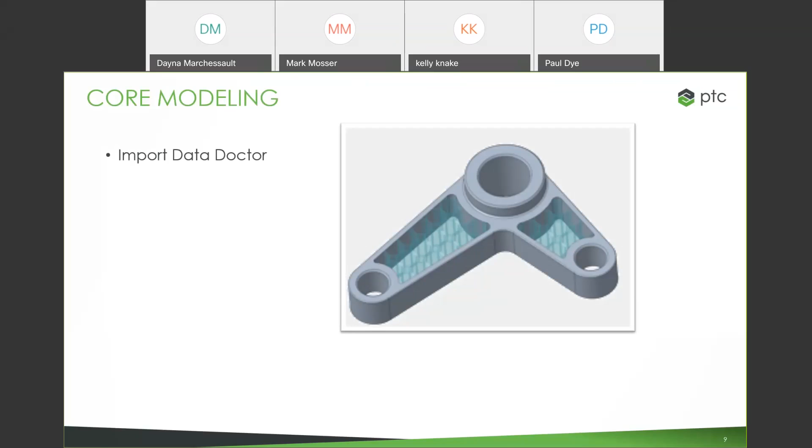We also have new display filters for geometries or representations. Whenever you're showing off different representations, we've improved your ability to show off different features. For example, if we wanted to share this design but highlight a couple different features, you could turn everything in the main body transparent, highlight, and change the appearance of these different latticing features. Definitely a lot of different uses there.

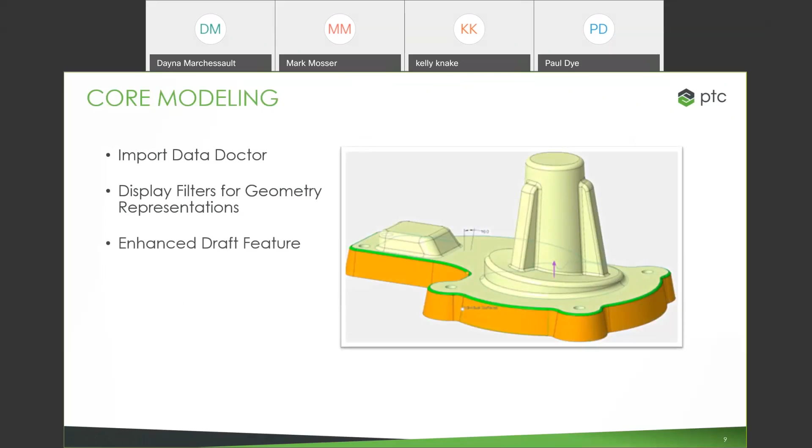We had enhancements around the draft feature as well, things like drafting already drafted features, and the ability to detect existing draft angles right in the model. It makes it a lot easier to work with and modify later on as we keep building on top of that.

Also improvements to the performance of snapping to model geometry or to a grid. This is another way to work, if you want to quickly move about and sketch onto points, edges, or different parts of the model geometry, you can turn on snapping to a grid for a lot of different uses. Whenever you don't need that, you can very quickly snap it off. Just another option in our quick menu settings.

We made enhancements to the mirror tool in the sketcher. It makes it very easy to grab things and mirror about - essentially you can mirror about anything now. Just grab a straight sketch you have and mirror about it. Even as you make changes, if you change the dimensions, your mirror feature is going to update right along with those.

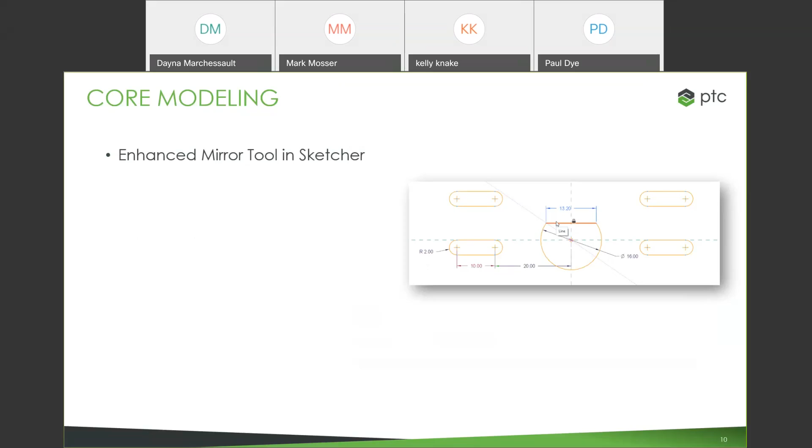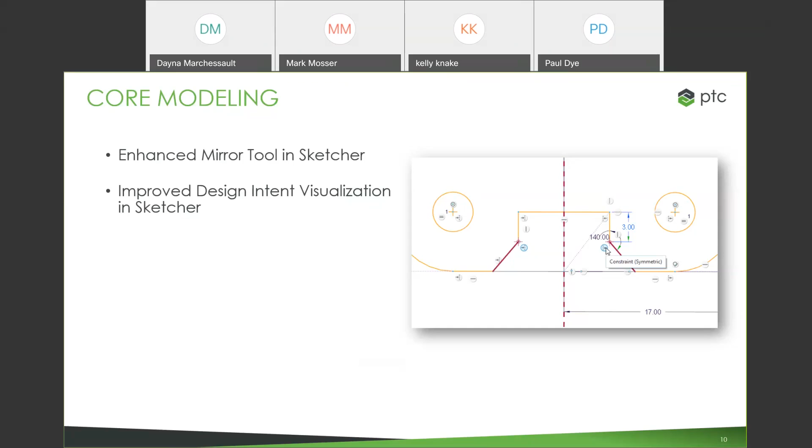We made improvements to the visualization of design intent in the sketcher. We've improved the look of the relation icons, able to highlight references and change colors. That's something you'll probably notice over the past couple releases of Creo - we've really made strides in modernizing the look and feel for working not only in Creo in general, but here in the Sketcher as well, building out your ability to display that type of design intent throughout creating sketches.

Finally, here in the edit dimension selection, you're able to set the appearance of your Sketcher constraints. That means whenever you click to edit any of those dimensions, it will also show the constraints. So that's another config option we have that we can edit there.

So that's pretty much it for going over just a couple of different core modeling capabilities. But what I want to move into now is more into some of the applications that we work with.

Starting here first with Creo Simulation Live, aka CSL. If this is something you haven't worked with before or even seen in the past, essentially it's a tool we've developed as part of our partnership with ANSYS. This is putting real-time simulation right in the modeling environment.

Normally it's another software you have to jump over into, build out a mesh and run through this whole simulation, whereas with Creo Simulation Live, it's really just right in the same parametric modeling environment that you're used to. It cuts out a lot of the process and the real headache that goes into getting the benefits you get from running analysis, right in the context of where you do design.

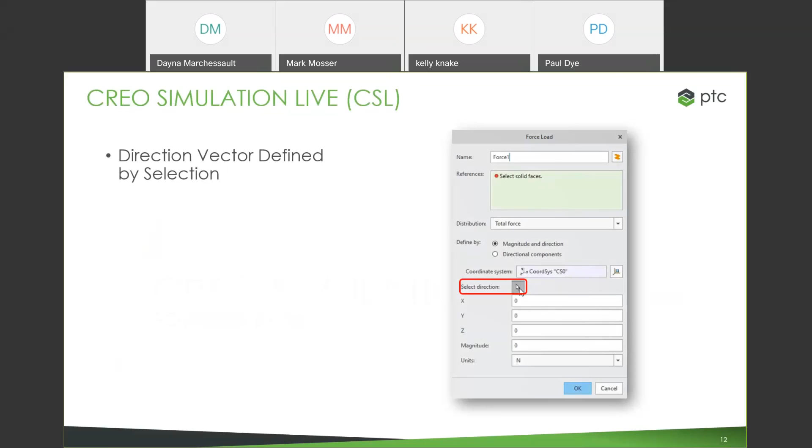It's real time. So quickly first, we're going to go over some of the improvements we made in this area. First is the ability to control the direction vector from a selection, so it doesn't have to be a default, and you don't have to go through and define all the XYZ components. You can simply select the direction, pick on any of the faces or wherever you want to use to define that, and it's going to build out those directions for you.

Building off of that, you're now not locked to working with the global coordinate system. You can now select any coordinate system that you have defined to go through and work with those load cases. So it's just improving the general ability to define those loads at the start of whatever study you want to do.

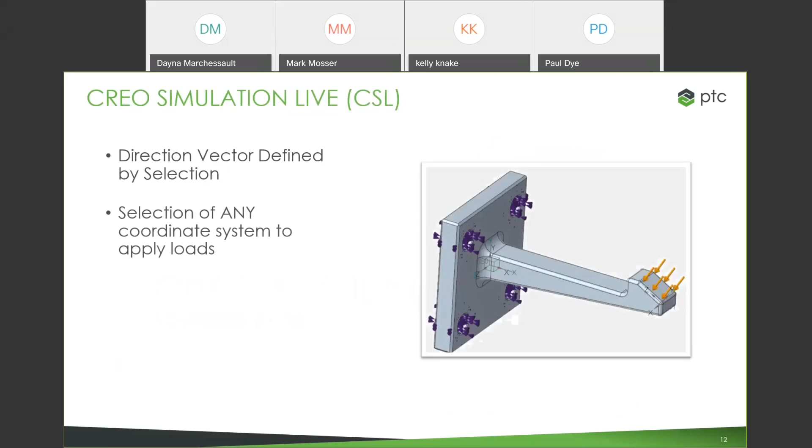We can also use values that we get from our simulation probes in Creo Simulation Live and utilize them in our behavioral modeling studies. Behavioral modeling allows us to take values, like your maximum von Mises stress or the displacement in a certain area, and actually optimize around it. We can tell the system certain dimensions it can change and different variables it can use, and the system goes through and automatically optimizes the model for us based on what we allowed it to change. It's a very useful way of using some of those analysis results we get back from CSL.

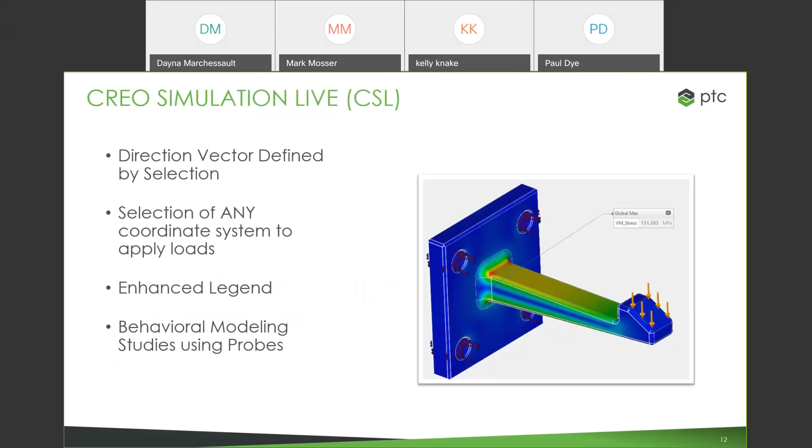Next, we've added more real-world constraint types, things like ball, pin, and planar constraints—things that exist elsewhere in Creo, but now we're able to use them in the context of CSL as well. It's just helping us make each of these cases more realistic to the problem or situation you're really trying to design around.

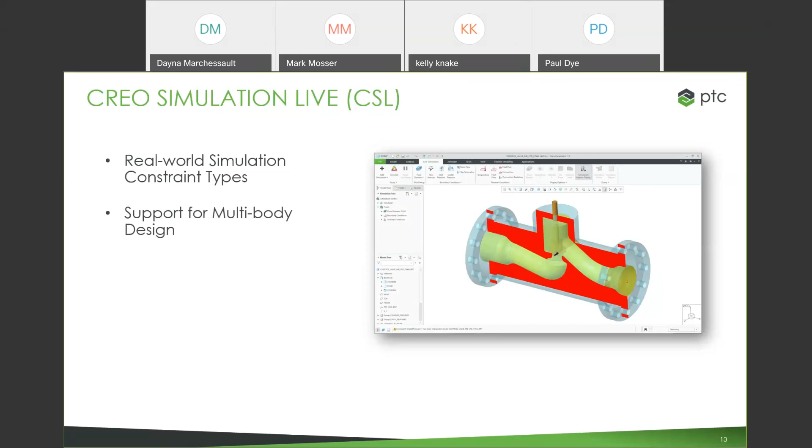CSL now has support for multi-body design, which I'm going to talk a little bit more in depth about, just multi-body in general. But obviously there's a lot of different applications of that—things like cavities, creating internal or external volumes, domains, and a lot more around those. Specifically for thermal studies, we can now do transient thermal studies, aka time-dependent analysis, which allows you to see how your results are changing over the course of time. So now in the context of that thermal study, you can do either steady state or time-dependent analysis.

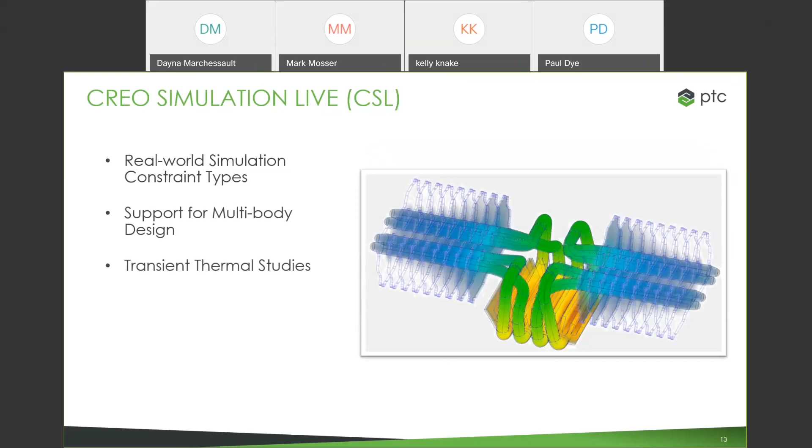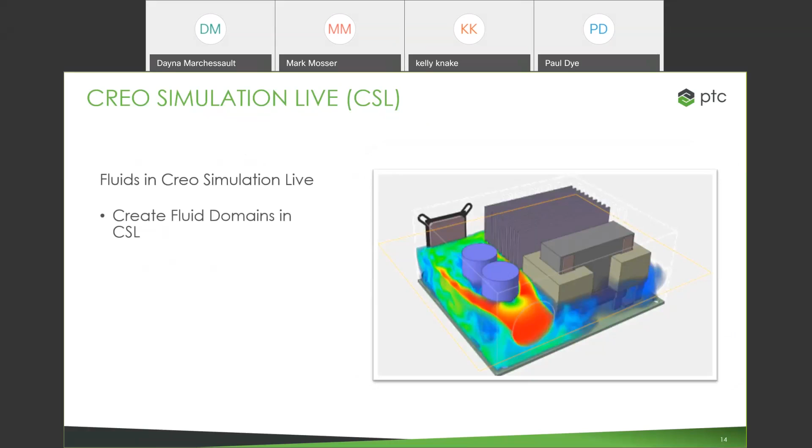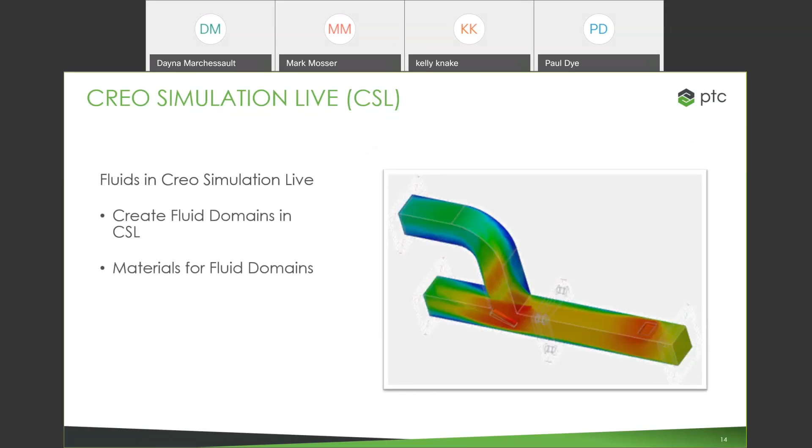The biggest change to CSL with the release of Creo 7 is now the option to do flow analysis. In the same way we do for structural, thermal, and modal, we start by creating a fluid domain, specifying which areas to include in the study, whether it's an internal or external flow, defining the inlets and outlets, and then specifying the materials you want to use. From there, you visualize it right on top of the model you're working with, regardless of if it's an internal or external case.

Around that, there are a lot of different options for the results you're getting. You can visualize streamlines, particles, take section views, direction fields, and set probes. It's a really powerful, but at the same time really easy to use tool for doing that type of flow analysis.

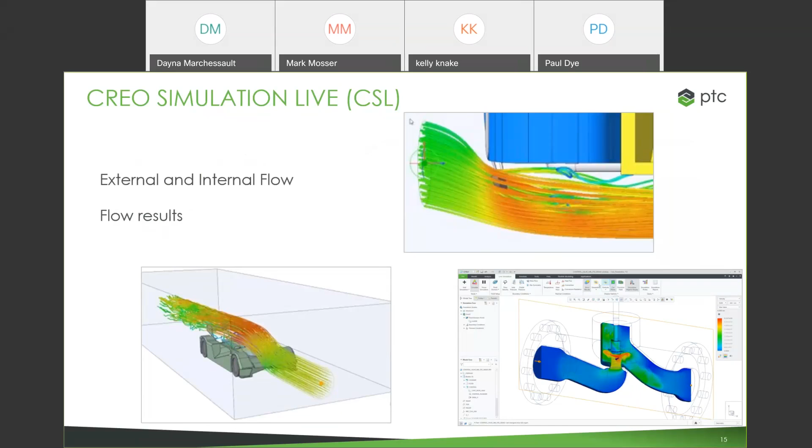Normally, if you wanted to work with things like this, you would have to get an expensive tool and have that expert knowledge to get real, actual useful results out of it. But this is something we don't have to send off to an expert analyst. As the designer, we can work with it right in the design environment and get those results back right as we're making changes.

Now I'd like to go through and show a little bit about what that looks like and how we work with this tool.

So let's switch over to our model here. For our demonstration of going through flow analysis, we're going to be working with a model for a muffler off of a motorcycle assembly. This is the part that actually came off of one of our customers, Royal Enfield, so this is the muffler off of one of their data sets.

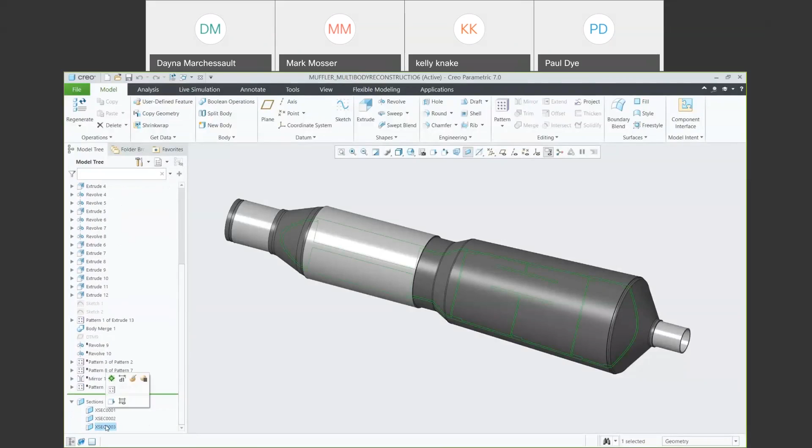What we want to do is simulate some of the flow that's happening with the system. Let's take a section view to see what we're working with here to start. There's definitely a lot of good geometry in here - a couple baffles, walls, and channels that we'll be able to change as we go further into this.

If we want to start into the study, we simply go right up to the top, click live simulation, and then start into the type of study we want to run. In CSL, you have different options - you can go into structural studies, thermal, modal. In this case, we want to do a fluid simulation.

The general path you lay out whenever you go into a flow analysis is first you lay out the fluid domain you want to work within. This could either be an internal case, an external case, or you could just have a fluid domain already defined and select that. In this case, we're going to do an internal flow through this muffler.

To do that, we'll simply define the inlet where we have the flow beginning, switch around to the back here, and define the outlet. The system automatically builds out the internal volume for that model. Once we select OK, that now appears down in the model tree, something I can go back to and make whatever changes I want later on.

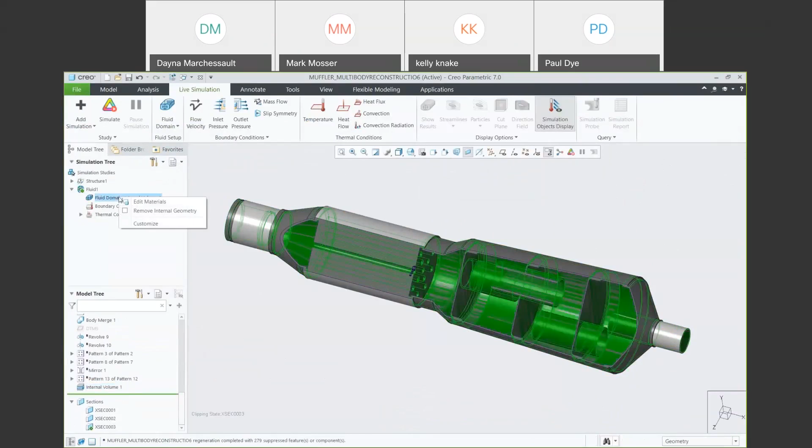From there, what I can do is define the materials for the study. We have a few base options laid out here that we could select from. In my case, carbon dioxide is going to be a really close approximation for what's coming out of my motorcycle, so I'll go ahead and select that.

Once we have that selected, we'll then go into defining the fluid flow velocity for my muffler - essentially, how fast is this going to be coming in from my motor. Specify the surface I want to work with, set the direction, set any of the magnitudes, even from a selection, and simply go ahead and do it like that.

So now I have that flow velocity set up. I can also set up some thermal conditions, maybe if I have a prescribed temperature at that inlet, and set the value, set the units - really whatever regular operating temperatures might be from that motorcycle exhaust. With that, I'm pretty much happy with a lot of the initial conditions around that inlet.

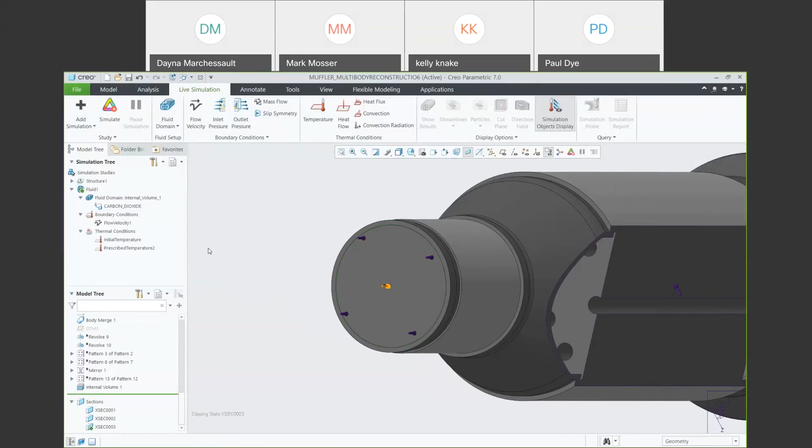So let's go ahead and move around to the back end here and define an outlet pressure. In this case, I'm just going to simply set it to 0, essentially just outside air. And with that, that's all we need to do.

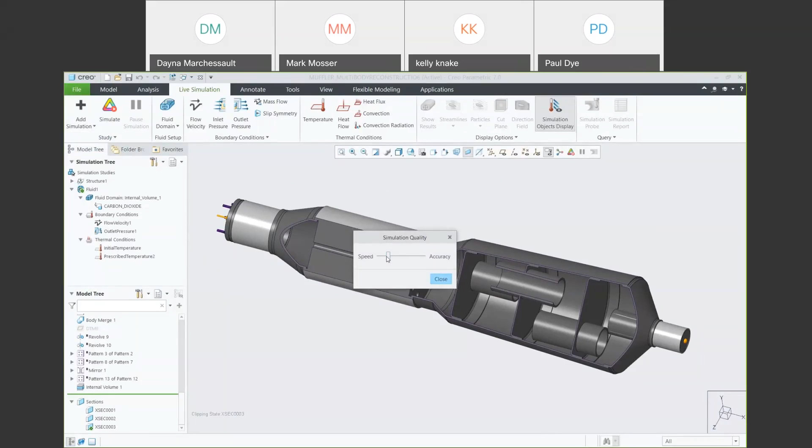We have some quick options we could go through here. We could change the simulation quality if we'd like, so we could slide it all the way over to the left if we'd like to focus on speed and optimize around that. We could keep it all the way to the right for the highest accuracy, or somewhere in between. In this case, let's leave it on highest accuracy, and we can simply go in and simulate.

As soon as I click to run the simulation, we're getting results back. It really is that fast.

I have a lot of abilities to change what I'm seeing here over my legend, if I only wanted to see the velocity within that particular range. I also have different display options I can choose from, maybe to visualize the flow of individual particles here, with even more options for that particle to change the size, change the transparency, really getting everything looking the way I want. This helps me understand exactly how this flow is working depending on how I set my model up.

Those particles are one really good way to analyze the flow. We could look at some other options here as well, like the direction field, which acts as a cut plane that I can use to see the direction everything's going. I can move that cut plane around to different parts of the model. Here I'll pull up my dragger tool and change that around to see the direction my fluid's moving based on however I defined it.

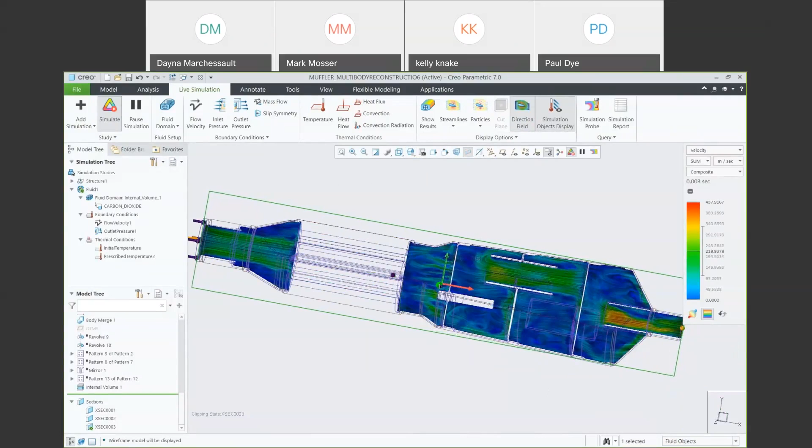This helps me really interrogate certain areas in the model. You can go through and type in specific values for that section view. As we can see, there's a lot of different ways to visualize the results, but on top of that, we can also analyze and begin to build off of those.

Starting here first, we're going to use a simulation live probe. This allows me to see the different values in the model. If we want to see our max velocity down by our outlet, you can see how that changes over the course of the flow. We can also see a graph of those values if we'd like, seeing them change, but also seeing how those are changing over time.

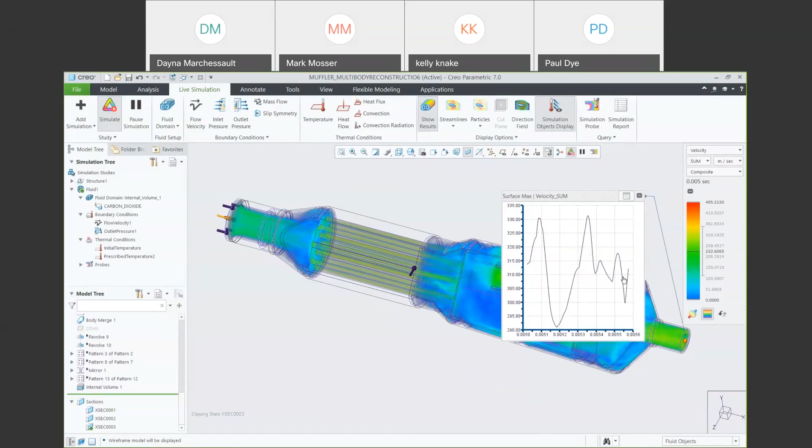We have other options as well to view things like pressure, temperature, vortices. Now these are all things that we can actually begin to design around. One of the best ways we have for doing that in the context of Creo is with the design exploration extension.

This is our tool within Creo for trying out new designs, iterations, branching off of existing designs. Instead of how you'd normally do it by doing save-as all the time, making copies, we simply just start into this with a pre-modified version of the model and keep it all right within this one session.

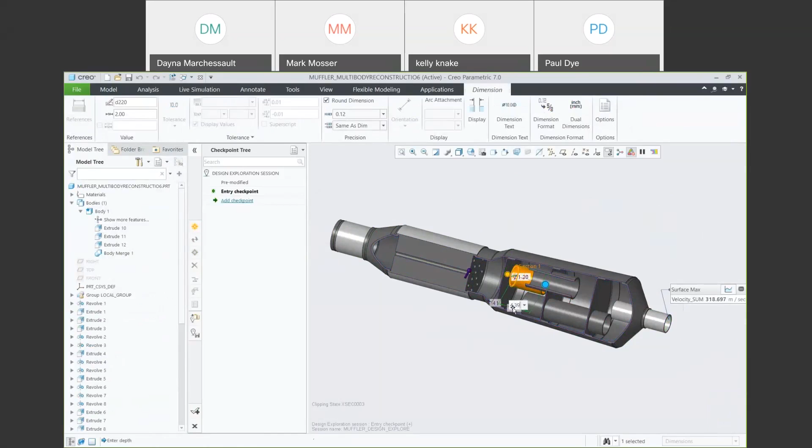As we go through and make changes, instead of saving off different copies, we're going to make checkpoints along the way. What I'll do here is for these internal baffles, see what happens if they were a couple inches longer. So we can go through and make any of these changes we want to. Even though we're running in this design exploration session with the flow analysis running, we're still able to do this standard sort of CAD Creo work that we're used to.

The difference now is as soon as I go through and make any of those changes, we're actually getting insight into what that does to our analysis. We check the particle flow, see where the velocity is increasing or decreasing, especially important down at my end velocity by that outlet.

You check that probe, see the graph, and that isn't something I send off to hopefully get results back by the end of the week. We go through, make the change, and see the result. And if I'm happy with the change I made, I'll make a checkpoint and call that 'long pipe.' So we're really keeping track of all these different changes that I'm making here.

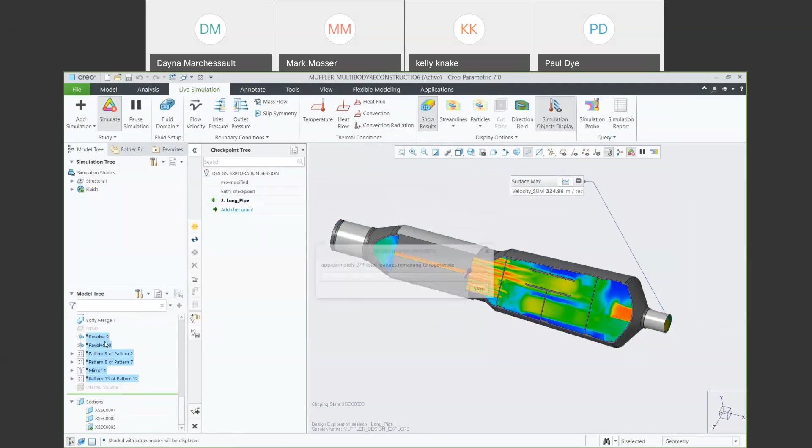That allows me to keep making more changes to the design. Maybe in a past design, I built out these pipes or baffles with holes in them, and I want to see how that design would work if I activated those holes. So we can go ahead and activate them and see how that's changing the results here in the model. Immediately, we're seeing a really different type of flow down by the outlet.

To get a better idea, we can check the probe, check the graph of those values, and clearly see that we're starting to increase that outlet velocity. But we can check into other values as well. We can switch over to that composite view, maybe see how the velocity is moving through our pipes, check the pressure, and see exactly where we're having pressure drops.

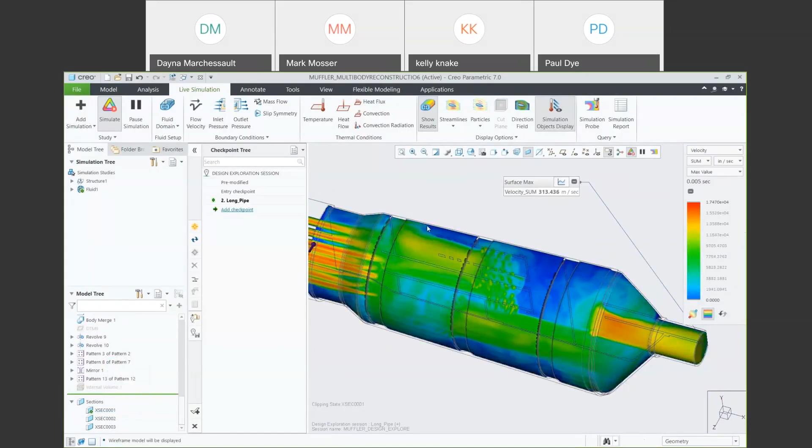It might be useful in order to see where we're having max values occur in the model. Similar to how we did with the direction field earlier, we can also take true section views to see what's happening at the different parts of the model. So we can flip this around to the back end to see what that flow is looking like through those holes we added in.

Maybe we'll switch back over to that direction field and actually see we almost reverse the flow through those holes. So whether that is or isn't what I want, we know exactly what it's doing as soon as I make the change. If I want to start to actually capture that design intent, I can then make a checkpoint to show right where I was whenever I made those changes for the holes.

Something that I can check back on later, switch between different checkpoints. It's really starting to capture the work that I've done throughout the design that I've worked on. So we're pretty much happy there. So we're going to move our attention more towards the beginning of the flow. Right now, we pretty much just have a solid cylinder with a bunch of pipes going through it, but I want to go through and change that design. So let's first clear out some of the features that we have in there right now and instead start with more of a clean slate that I can begin to add to as we go.

Let's also use one of our multi-body commands here to very quickly remove that body from our model. And there we go. What I actually want to add in here is more of a lattice feature that's going to be used to regulate the flow throughout that channel. Now, that could be something that we're going to create using additive manufacturing. Around this lattice, there's a lot of options.

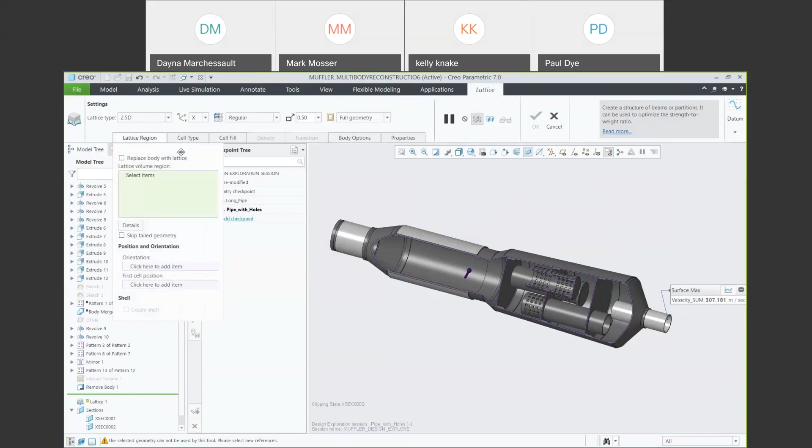So first thing that we're going to do here is begin by specifying the surfaces or the area that we're going to use to define where that lattice should be placed within. That's what we call a lattice region. You can see here, we'll go through and select on any of the edges we might want to define that region. And latticing, if this is something that you haven't seen, this is a feature that we've had a lot of focus on over the past couple of releases of Creo.

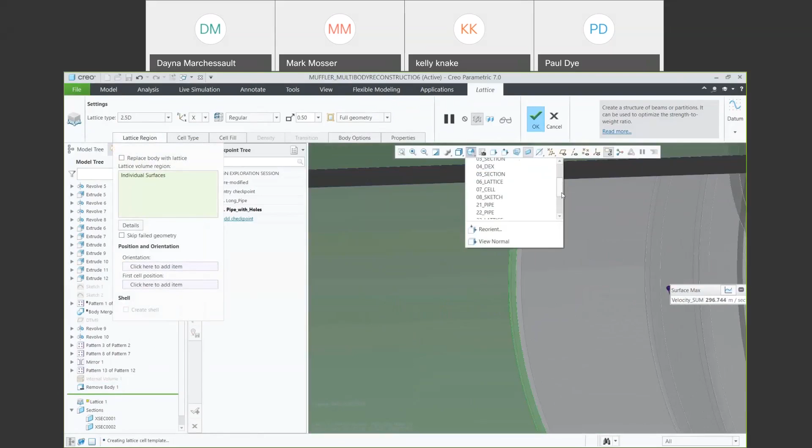It gives us the ability to create some of this really robust, complex structure with a lot of different use cases. So we can quickly go through here, define our coordinate system, state where that first cell for the lattice should be placed, define what the cell shape should be. We have a lot of different options for those shapes. We could do different 3D shapes. More like we're doing here, we could set it to more of a 2.5D shape in the shape of a hexagon. If it's a little bit big, we can scale it down.

Once we have it down in the size we like, we can go ahead and change some parameters about it. So if some of those walls look a little bit thin, I can increase the wall thickness. You can actually visualize it to see if we like it. If we do, go ahead and make the change.

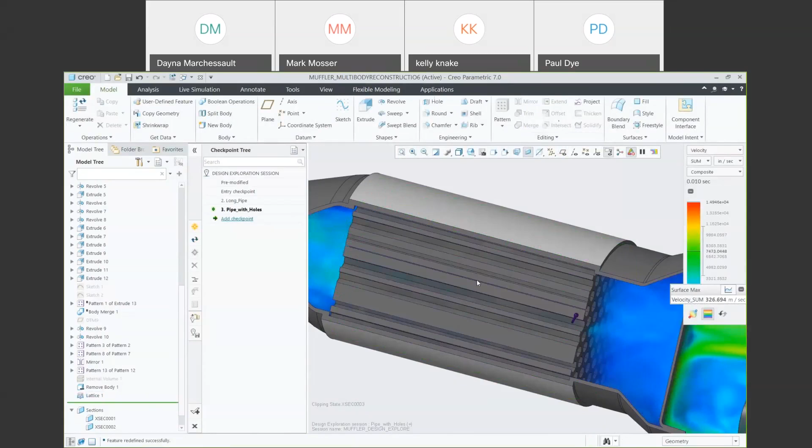Again, as soon as I go through and make that change, even though it's a pretty significant change, the analysis has already been updated. We can go through and analyze the effects of that, change the display type, change the different result types that we're seeing. We can obviously see different flow type through there, and especially around that pressure, that we have the pressure drop moved all the way towards the middle of it now, maybe different from what we had before.

We can check back down around any of the areas, change around the display types, see the values we're getting down at our outlet have changed around to see exactly what that's doing to the graph of those values.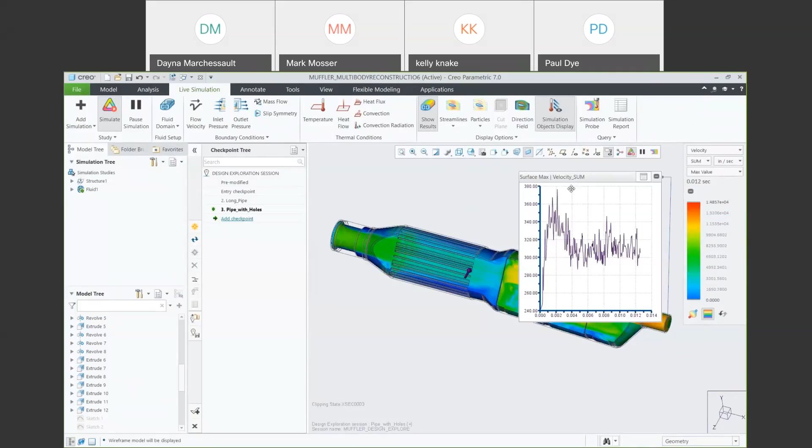Once I've had the chance to look over the results, because I'm in Dex, or Design Exploration, build out a checkpoint allows me to see exactly where I was and what changes I made. If I'm happy with those, I can choose to accept the changes, and then all those changes are applied to that pre-modified version of the model.

But even though the design exploration is a great tool, I don't have to be in Dex to make the changes to the model. It's gonna be a day or two later, and someone says, "Hey, Paul, we need to decrease that outlet velocity." Well, I know maybe one way to do that is to decrease or increase the outer diameter of that outlet. We can go ahead and make that change right there.

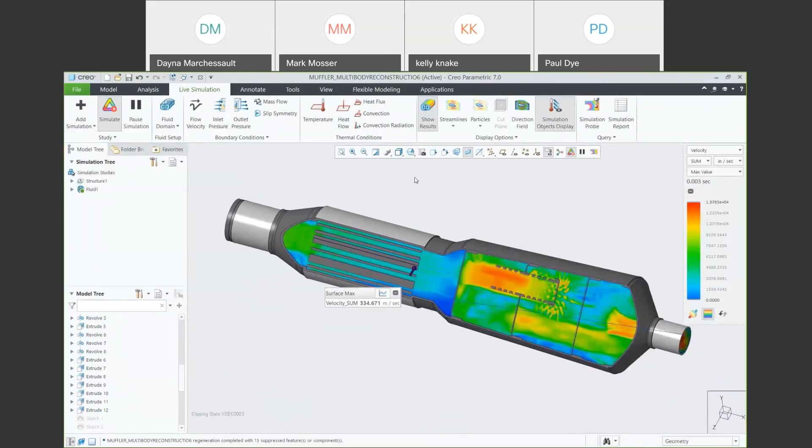Simply regenerate the model, and we can see that the analysis updates right along with it. We can go back here, check in with our simulation live probe, and see that now our velocity is down around 240, 230. So it's definitely dropped down a bit.

That's really the idea with the flow analysis in CSL. We're able to make as many changes as we want. Try this, try that, try anything. You don't want to limit the amount of creativity you could have in your design by having to wait around for someone to give your analysis results back. You can go ahead and make the changes and see exactly what that does to your analysis.

And again, that's just one type of analysis that we have in the context of Creo Simulation Live. There are obviously other examples for doing structural studies, vibrations, or thermal studies if you want to look into that. So definitely a lot of different options to go through and look at there. But for now, we can go ahead and move on to touching on some other subjects here.

The next area is around multi-body design. This is offering a new way to design in Creo, something we've added to give us the ability to work with some of the applications we now have in Creo, such as the Creo Simulation Live Flow Analysis. If we want to work with some of those domains, that's utilizing what we have in multi-body, and what we'll see in a little bit with generative design.

So a couple of areas where we have some enhanced capabilities that make use of this multi-body design approach. What that does is really allow you to be flexible in the way you design the parts in your model, so each of those bodies can be handled differently. You can have different materials included or excluded from your mass calculations, have them included or excluded when you define your global interferences or clearances. There are a lot of options around those.

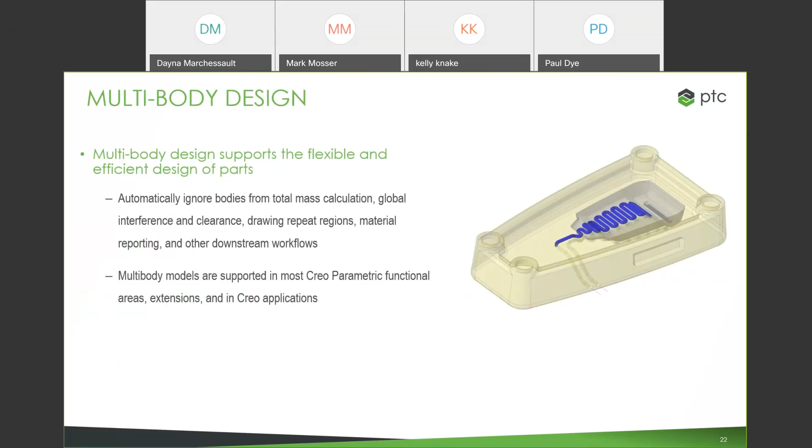This is something that's really going to be supported mostly everywhere in Creo going forward. Each of these bodies can have their own individual appearances, different parameters, attributes, and with each of those we have a lot of different operators for working with that geometry. That means merging, subtracting, intersecting, and once you've done what you need to do, you can go ahead and make part files out of any of those bodies. It's a really powerful way to work.

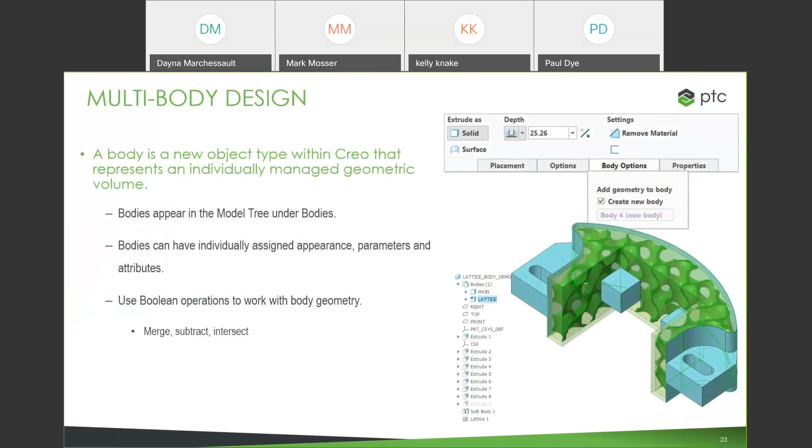If it's something you've never worked with, particularly around multi-body, it's definitely something you're going to want to try. For some people, the standard way we're used to working with in Creo is going to work just fine — you may never even need to use multi-body. But for some people working with these new applications, like flow analysis or generative design, it's going to open up a new world of possibilities. It's going to get you there much faster and easier for some geometry, maybe as opposed to your typical surfacing and quilt-based workflow.

Quick look through there. Another area I want to look into is particularly around additive manufacturing and the use of 3D printing. The first thing we have is improvements to stochastic lattices. This is a lattice type that creates more of a randomized beam and ball shaped lattice that's really useful in a lot of different ways, like for medical purposes or creating bone grafts. We've seen some really cool uses out of that.

What we've done to enhance that is the way the lattice follows along some of the hard edges of the different parts and models you work with. So it's further making those structures even more structurally sound.

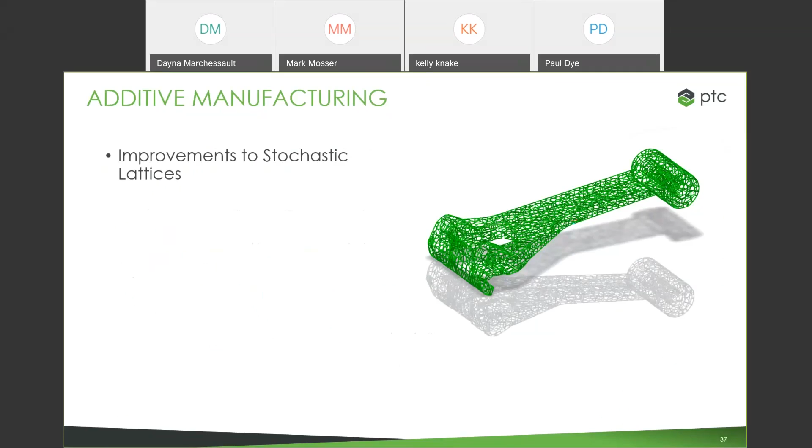Next, we've had improvements to custom lattice cells. This is where you're taking a part file and using that as the cell for the lattice. In the past we've had the option for using full geometry, but we've also seen some people that want to use custom lattice cells in 10 or 100,000 of these different cells. So with those, you're probably going to want to use more of a simplified B-rep geometry. Now we've introduced the use of that as well.

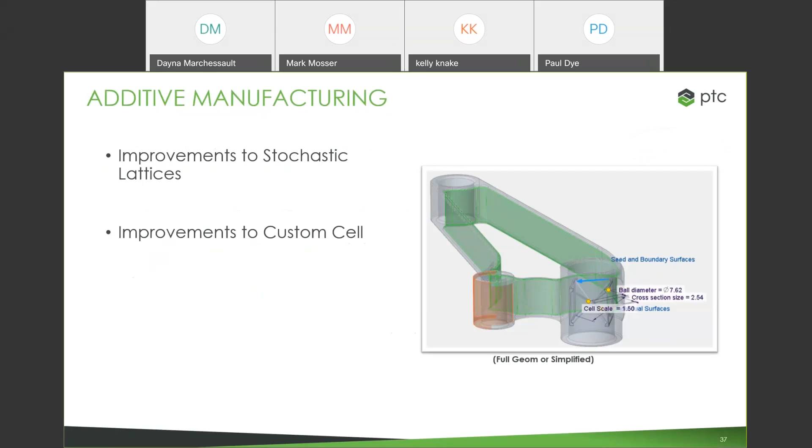And then specific to the additive manufacturing plus extension, we've made improvements to the tray assembly definition using that multi-body design approach. That means even within the same part file, we can have different bodies with different parameters, wall thickness, colors — so a lot of different uses there.

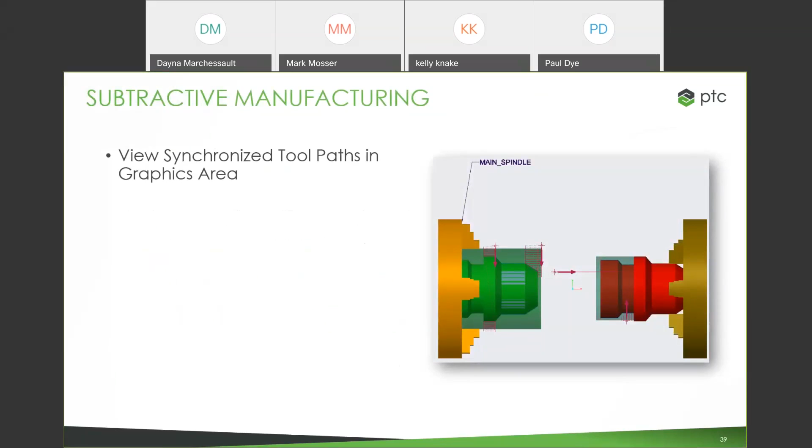On the other side of things, almost the opposite world here, we have improvements over in subtractive manufacturing, or machining. The first thing we can do now is view synchronized toolpaths right in the graphics area. We've always been able to synchronize those toolpaths, but now we have a synchronization menu where we can actually highlight on those to see, view, and at the same time keep track of what those are doing.

And here we have multiple go home positions. We've always had the go home command, but some machines now work with multiple different go home commands, where you could have home 1, home 2, especially if you're working with mill turn operations. Whatever you need there, you're going to be able to do.

And finally, the ability to explicitly call out Swiss turning operations. Again, if you're working with a mill turn machine, you can fix the Z-axis and put in all the appropriate CL commands to that output file. That's definitely an awesome thing there. If you work with Swiss turning, definitely something to keep in mind.

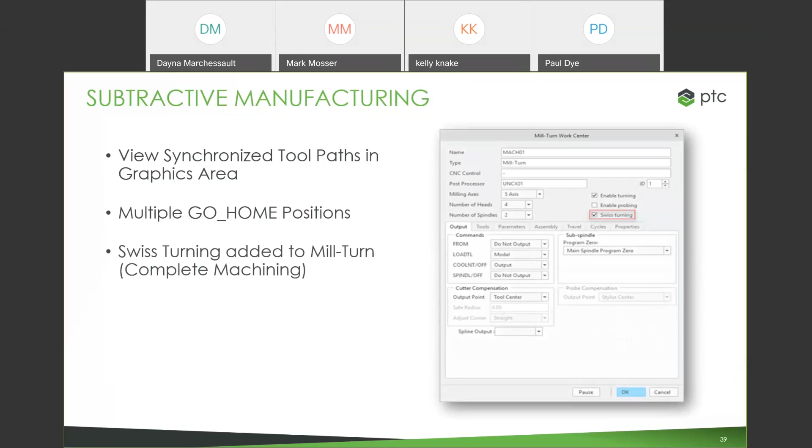Moving on, we've made a lot of changes and a lot of support specifically around the area of detailing and model-based definition. We see a lot of customers nowadays starting to move more in this direction, taking the information that you would typically define on the 2D side and starting to define that right from the 3D models themselves. We're doing a lot of work to support the areas and the work being done in that field.

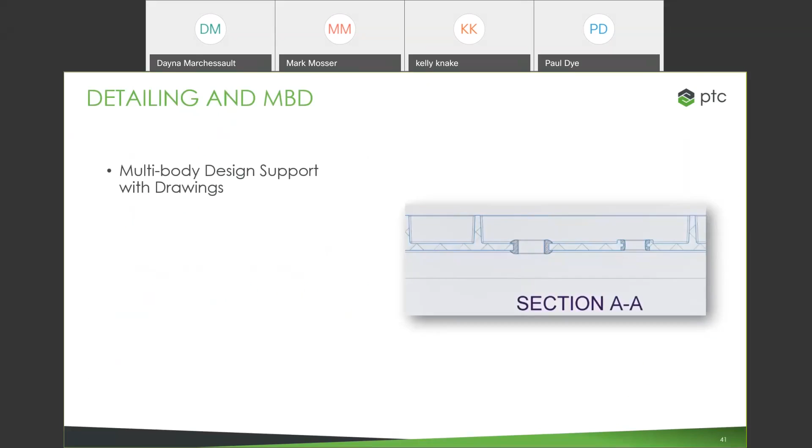First, of course, we've included multi-body support for our drawings. So if you're still working with those drawing types and you have these different bodies with different materials, even if they're right in the same part, you can go ahead and make different cross hatchings, just different ways to further differentiate them. We have repeat regions in the drawings for those multi-body parts, or exclude certain bodies and include all that right in your tables.

Then over in the drawing model tree, we have control of those different bodies. So I can identify them, hide them, and just have our ability to keep it all straight.

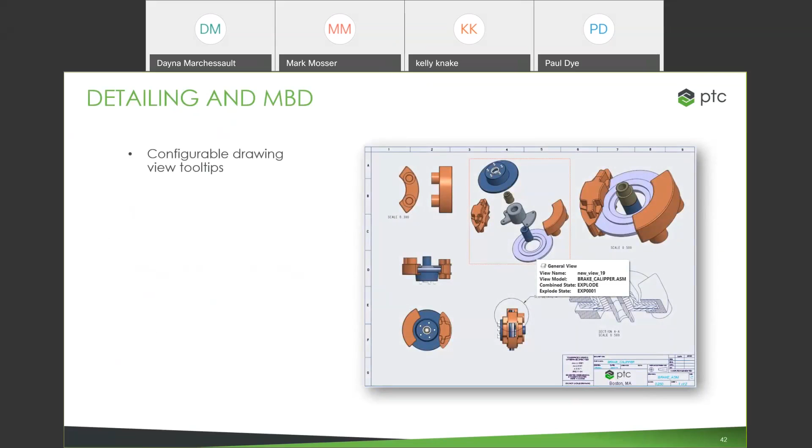We can configure drawing tooltips. So you can click on the view, see what the part is, see what the model combination, check out the exploded state. You can do it all right from there.

We also have a new summary view command where we can click on an element and have the system tell me about it. It's a good way to understand the design intent, especially if you weren't the one that created it, but you're viewing it. It's definitely a good way to see that there.

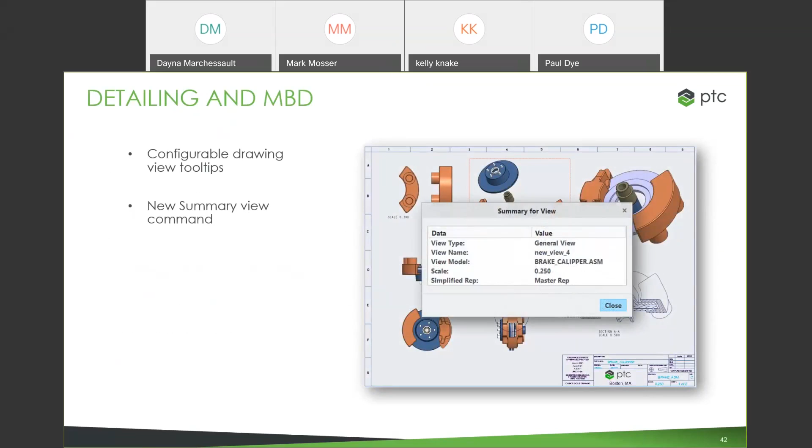We have improvements around the addition of drawing tree columns, so adding those in as an option now. And around that, being able to sort the drawing tree by view models and parent views. So building out the drawing tree how you like it.

We've made improvements in the area of removing hidden lines. So if you want to view those and remove some of those lines and exactly how those show up, it's much easier to do now, and you have the options around doing that.

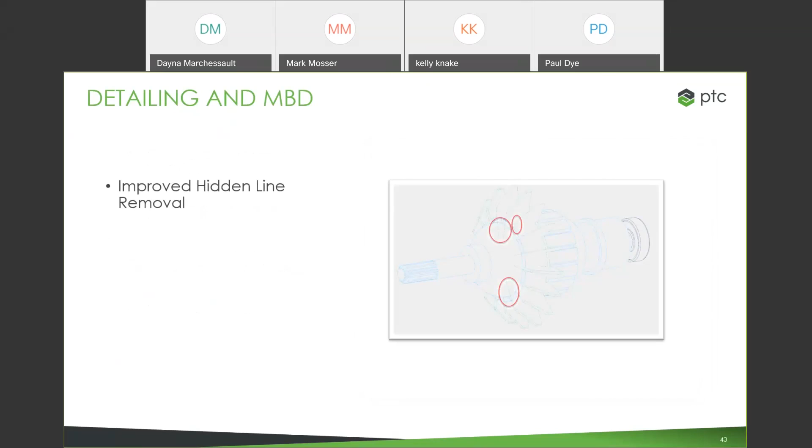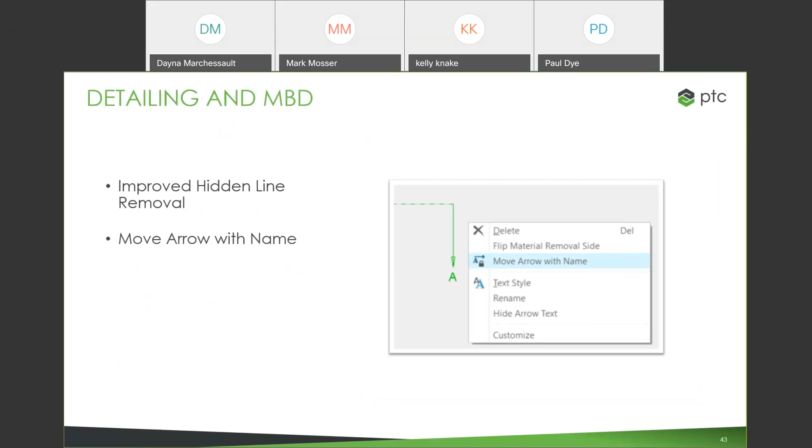We also have the ability now to move the arrow with the name or whatever it's linked to. So you can link the two, so whenever you move the name around, the arrow is going to follow right along with it. Or you can break that connection, either way.

You also now have the option to add multiple leaders. So there's an option where you can have multiple normal tangent leaders, all coming off of that one common annotation. That's really helpful for particular GTOLs, notes, symbols, anything that you want to add that's referencing those different areas throughout the model, even if they change.

Next, we're able to align ordinate dimensions with the baseline. This is something you're going to run into if you're working with the ANSI standard, and it's how they like to do it. So we built out those ordinate dimensions to work very well with those baselines.

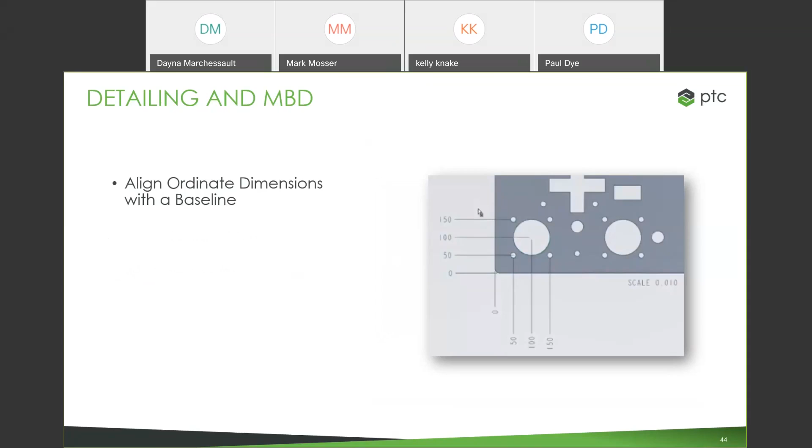We can control the length of intersecting contours, so just beyond that intersection point, you can enable intersection witness lines now. We also have child view identification. It's very easy to see where your drawings go to, especially useful if you're working with multi-page drawings. Or again, even if you weren't the one that created the drawing itself, it's really helpful for keeping all of that straight.

We've continued to make improvements around GTOLs, so now we have additional indicator values, things like intersection or collection plane for angularity, in that case for the ISO standard.

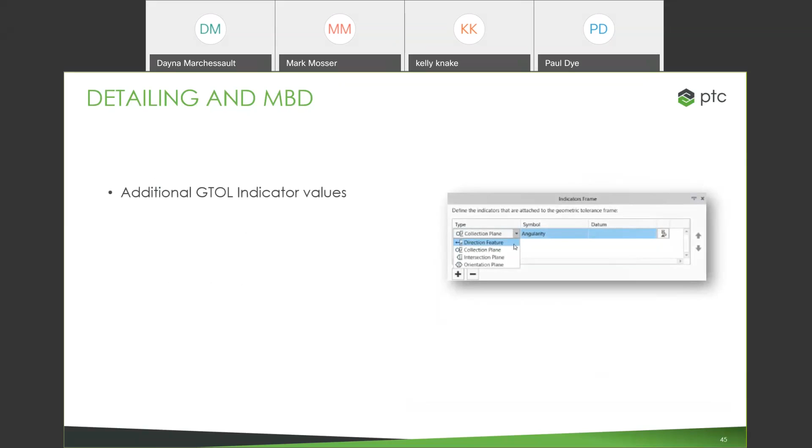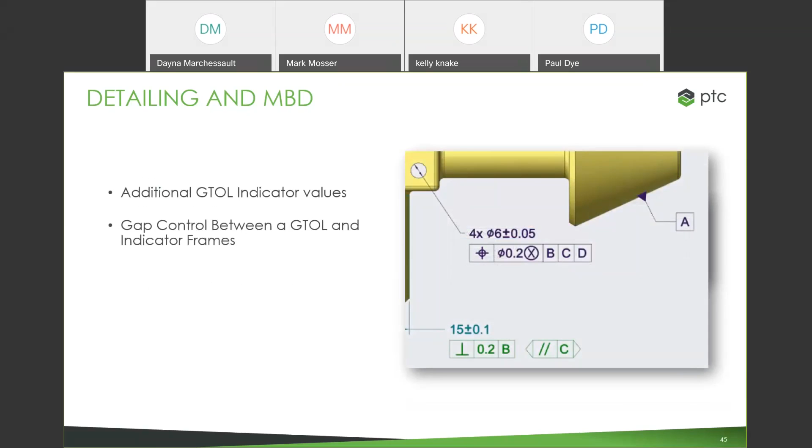We have options for controlling the gap between a GTOL and the indicator frames. Depending on the standard you're working with, if you're working with ISO 1101 2012 or 2017, you have different options for that potential gap size. And around those standards, as they keep getting released, Creo is going to keep evolving right along with them. So now we've included support for both ISO 1101 2017 and also ASME Y14.5 2018.

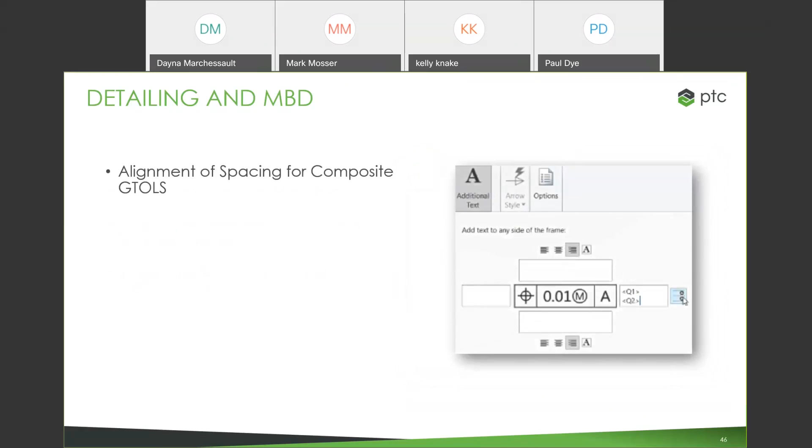Lastly, touching in here, we have some options for the alignment of spacing when it comes to GTOLs, depending on how you want those GTOLs to align, on the left or on the right. That's all done keeping up with those different standards.

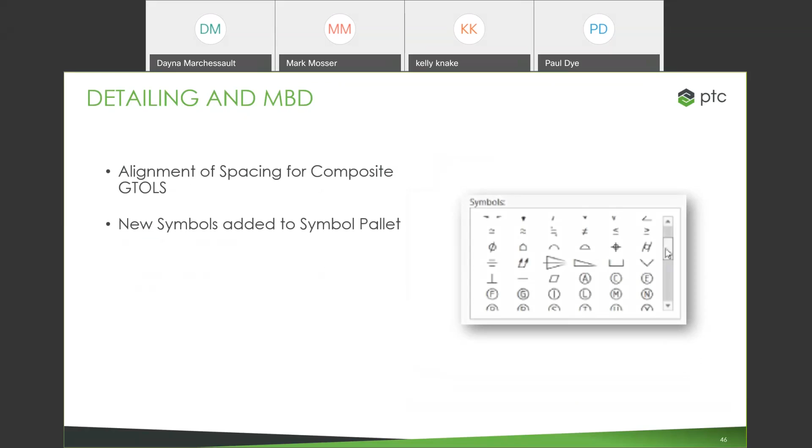Here we've added new symbols to the symbol palette. We've been really enhancing and building out a lot of those different symbols. Particularly, we've added the angularity symbol for an intersection plane, the runout symbol for a direction feature, and also the symmetry symbol for a collection plane. So if you work with any of those, definitely a nice added feature.

Finally, we've updated the parser for our syntax checker. That's taking into account all those new standards and making sure it all runs well. These are areas that a lot of people we work with tend to work in and really have to abide by a lot of those different standards. So definitely a lot of really welcome changes made in those areas.

Taking a left turn here, what I want to talk about is probably one of the biggest developments with Creo 7: the introduction of generative topology optimization. Generative design, in short, autonomously creates optimal designs from whatever set of system design requirements you have. Right in Creo, you're able to specify the requirements and the goals, and the generative engine is going to automatically produce a manufacturable design that you can either use as a starting point to build off of, or even as a final solution. Around that, you're able to try lots of different materials, physics, and manufacturing constraints, and automatically generate that geometry.

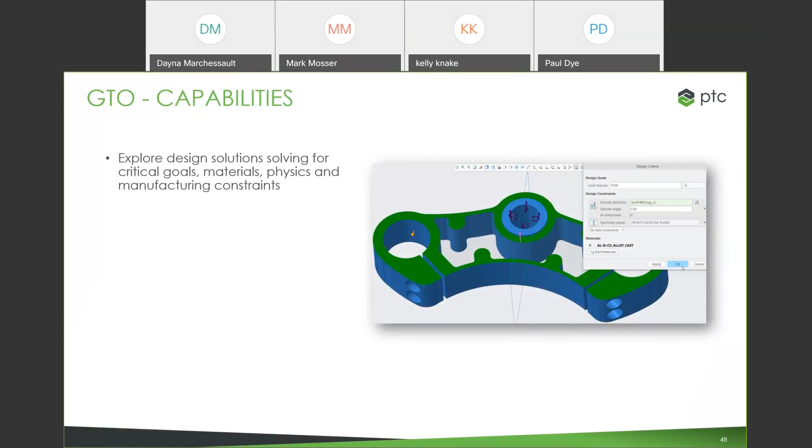This allows us to try out many different generative design studies, explore all different kinds of design alternatives, and at the end compare the results between each of those that you got. So you can start working towards that most optimized design, and it really gives you a great place to start from and build off of.

While we're doing that, we're able to visualize all of that generation in real time. And even when we go back and modify some of the input geometry or change around the design criteria, that's going to automatically update the results that we're getting.

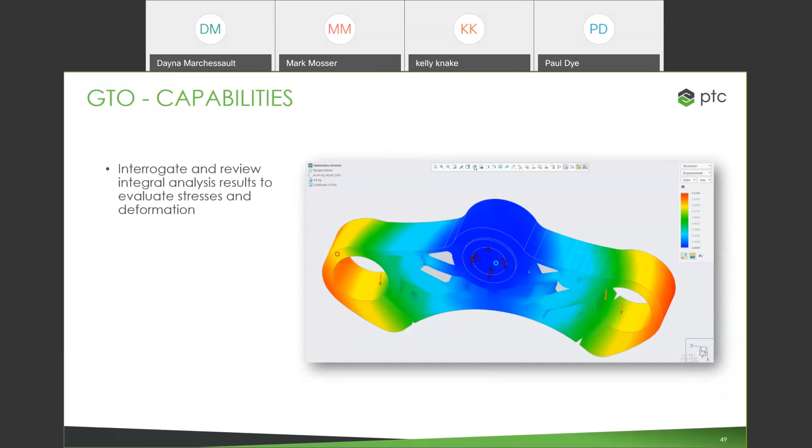Once we get those results, we're able to go through and interrogate and review the analysis results, see where our stress values are, what the deformation's looking like. As we start to get those results, we go back and change things: change around the design constraints, try different goals, different geometry, different materials. It's really a ton of different options and ways to build out that model. You're really starting to get an idea of exactly how that geometry is acting and what you need to do to get it to fit into the goals you have for it.

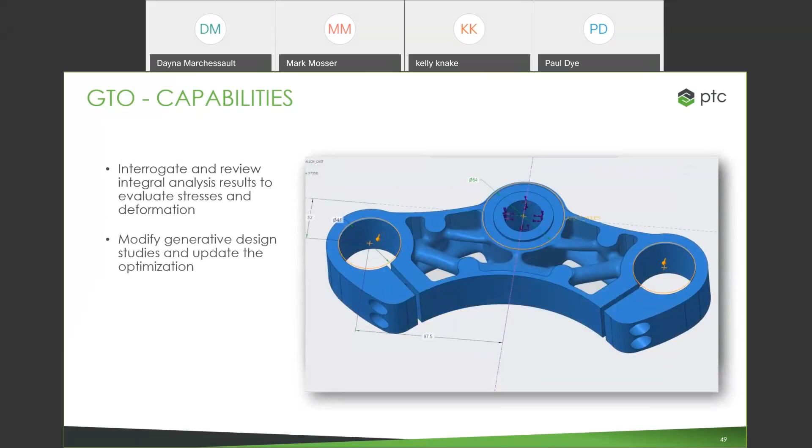We're able to do all this because it's integrated right in Creo. It's not some other software we have to send it off to. We actually integrated this Frustum technology right into the modeling environment. It's not some separate window or software we have to switch over to. All we do is define the geometry, say what things we can change, what things we can't change, any constraints we might have, and just let the system go.

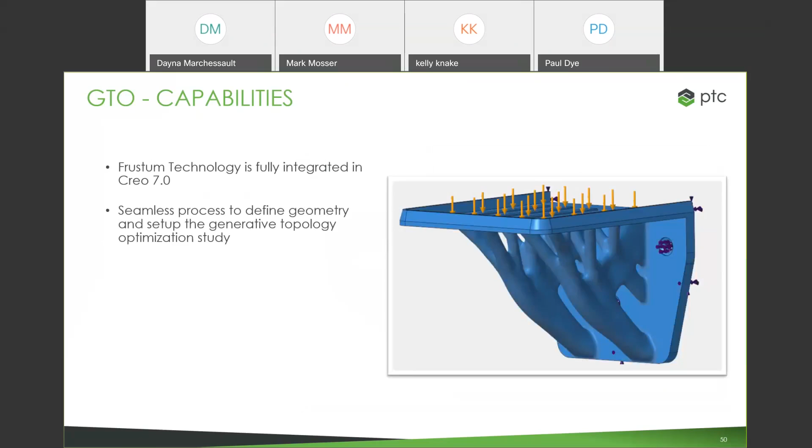Once the system generates that design, and you have the chance to review it, you can go ahead and output the results to use elsewhere in Creo for further refinement. We can simply take that design and convert it to solid B-rep geometry, so we have different options for how the model is reconstructed. We can go back and forth between the two, see what's changed, and do all of this to get the best model possible, but at the same time with real manufacturable geometry. We don't want to just have a tessellated file that's nice to look at. We want to actually create a file that we're able to work with and really use out in the real world.

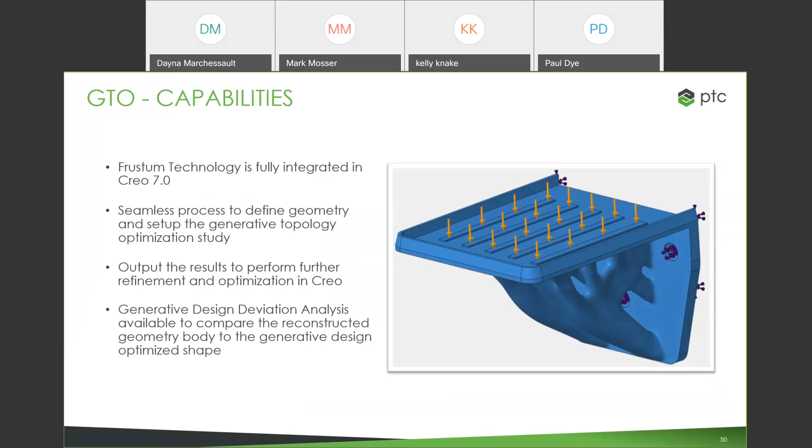This is another area that really makes more sense as I go through and show exactly what it looks like. So let's go ahead and jump into an example.

And so here's the model that we're going to be working with. This is actually that overall assembly from where we took that muffler off of earlier. This is the Royal Enfield data set using that motorcycle. I think this one's actually the Enforcer motorcycle.

And we're going to go ahead and take a look at, particularly up here, into our steering mechanism, more specifically down here on this lever yoke. Right now it works perfectly well. This is actually something that I want to see if I can cut down on some of the material around this. I might know some of our different design goals that I'm after or what I want to use, but I'm not exactly sure where or how I'm going to get there.

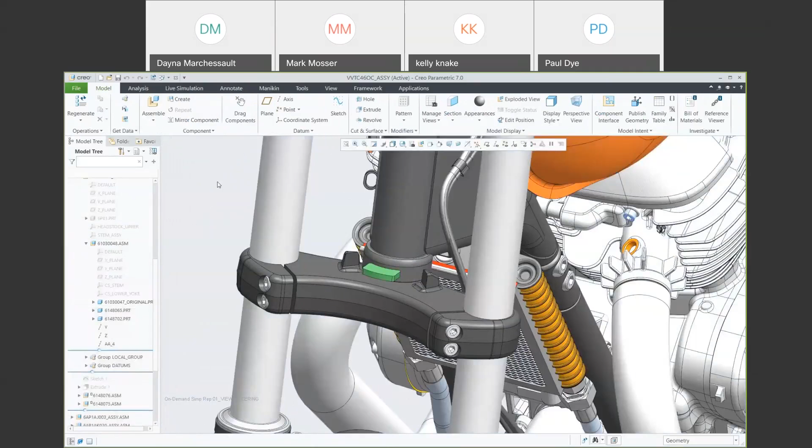Well, that's a perfect candidate for working with generative topology optimization. So let's go ahead in here and open up the part that we're going to use to get working.

So here we can see that same yoke part, but a little bit more of a simplified version of it. And this is going to be the base that we're going to begin to build off of. This first starts with having our envelope of area that we're going to build out within. This is essentially the overall area that we can design within.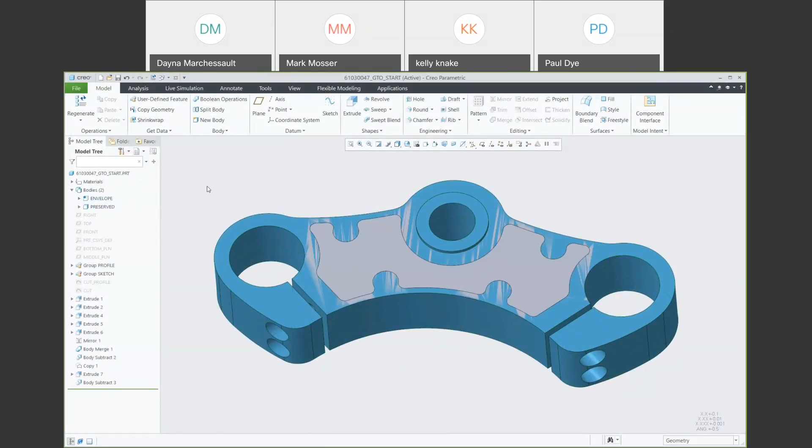And then next we have our preserved geometry. Essentially, that's the area that I want to keep, and that's something that I'm going to build out in the middle of. If we want to begin into building, we simply go right up into our applications, select our generative design, and then go through and lay out our design.

Okay, the first thing that we're going to do whenever we're laying out our generative design and our generative process here is setting the starting geometry. So that's again that envelope we began with. So we can pick that right out.

So now it's going to be more of a transparent area. You can't really see it right now because it's essentially overlapping with that preserved geometry, but we're going to be able to build out in that gray area that we saw. So next we'll have that preserved geometry laid out here as well. That's again just the area that we want to make sure is included in the final design.

Here we'll go through and apply some of our constraints. So in this case here we might have a pin that's fixing this design right down there in the middle. And then we'll lay out our loads that we want to study. It's going to be forces, moments, pressures, centrifugal forces. Over here we know that we're going to have some different forces applied on the outer surfaces of that yoke, so we'll lay those out here.

So now that I have some of those different initial conditions laid out, it's time to say what we want to design for, so what our goal is going to be. Well, I'm trying to take weight out, so we're just going to fill about two-thirds of that volume. And then also we have some different manufacturing or design constraints that we can build out.

So here, if we know that we're going to be taking into account the build direction for additive manufacturing, maybe a parting line if you're doing a cast, or on the other side of it, it could be down here with our geometric constraints. Just making sure maybe here we want to make sure that it's going to be uniform on either side of that plane there. So on the left-hand side, it's going to be the same as the right.

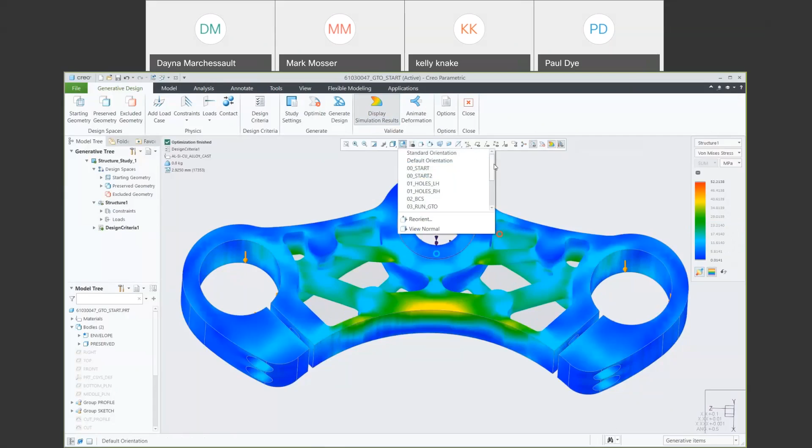So right on the model, we can take a look at our von Mises stress, see exactly where we're getting maximums and minimums. Let's move up to the top of the model here to check out maybe where our hotspots are going to be. We have different display options for looking at the displacement, maybe see if that part's deforming in the way it should be based on the loads and the constraints we set up.

We can even take it one step further to understand it and actually animate on that deformation. We can change the speed of that animation, change the scale. It's a very visual way of doing it. And if we're not happy with the results we got back, we can just as easily go back and make changes to the definition of the study.

But if I am happy with what I got here, I can now choose to generate that design. I'm going to take that tessellated geometry and reconstruct it as a boundary representation, aka BREP, that I can take over into Creo Parametric. Rather than being stuck with that tessellated file, we're now getting real manufacturable surfaces, aka curvature continuous, that we can begin to work off of.

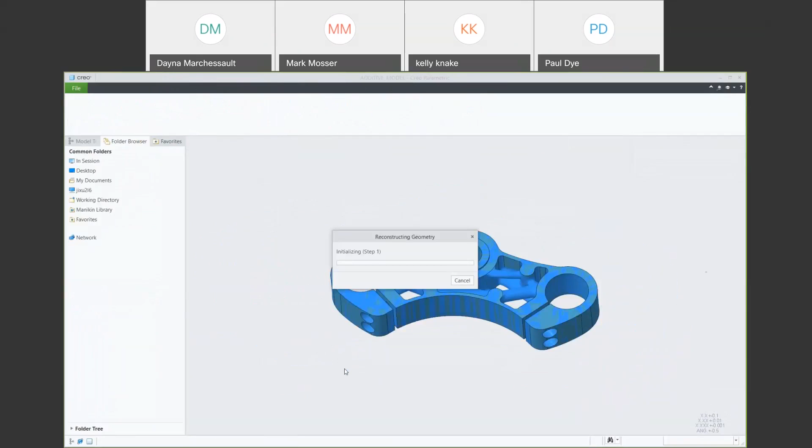So what Creo is doing now is reconstructing all that geometry that we just built out in the study. And now it's just part of the Creo model, something I can add right back into my part. Here we can use some of those multi-body Boolean operations to merge our new geometry and add it back in with that preserved geometry we began with.

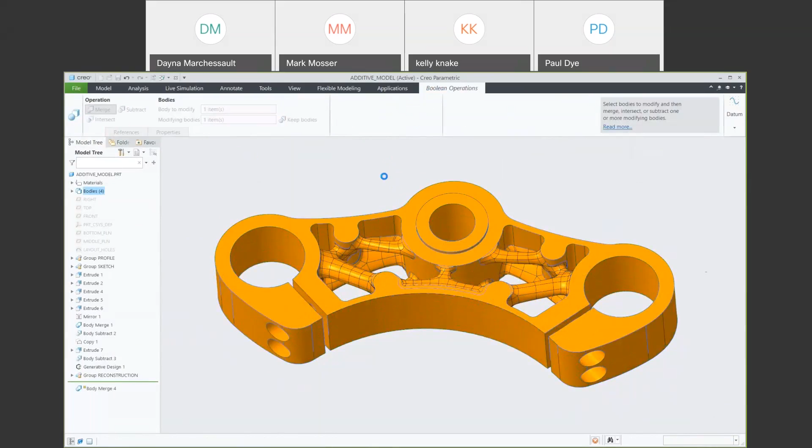And just like that, we now have a solid Creo model. It's ready to go. That's something I could now take over and work with in other areas. But now what happens a lot of times at this point is maybe the model has to change, or somebody else on my team says, hey Paul, that outer diameter, we got to move that. We got to scale it down, scale it up, whatever it is. But does that mean I have to start everything over from scratch?

Well, no. All we do is go back in and change around whatever we want our design goals to be. In this case, we actually want to change up that design criteria. So we'll still maybe type in a limit volume there, maybe increase it a little bit, still have it be symmetric about that middle plane.

But what I want to change here is, in this case, maybe I don't have a 3D printer. Some of that geometry just isn't possible without the use of 3D printing. Well, again, that's no problem. I go into whatever manufacturing techniques I use. So here I want to build this out as a linear extrude. I can build that out and simply have it be done that way. So I could really build this out for whatever manufacturing techniques I have available.

We'll add in those materials, go through and check into our study settings. We want to change any of those around before jumping into the study. Really anything that we want to go through and change that.

And so in this case, I've already gone through and run the study before. So maybe instead of running through all that again, we can go right into the File Explorer and open up the result we got after converting to the BREP geometry.

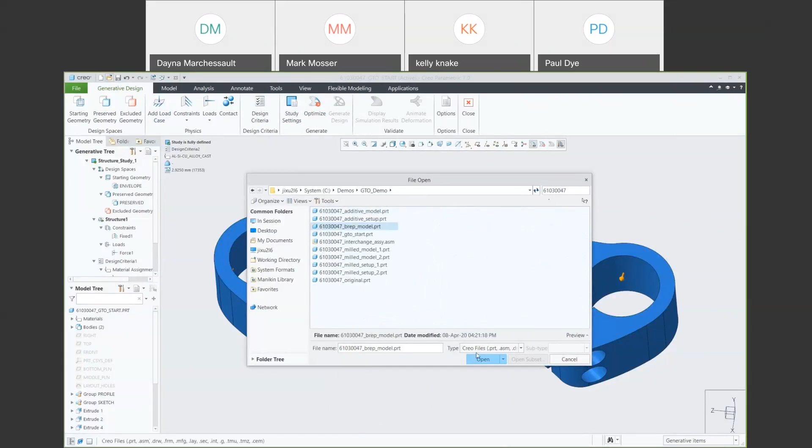Whereas before, this design was really only possible using additive manufacturing techniques, this is a part that could be used for milling. This could be used for casting, extrusion. So that's something we can work with now and actually take further and do analysis on, make changes to the model.

And like we saw earlier with working with Creo Simulation Live, we could maybe even do more of a structural study around this. So taking those loads and constraints we saw earlier, go ahead and work with it here and make changes and see exactly what it's doing right in Creo Simulation Live.

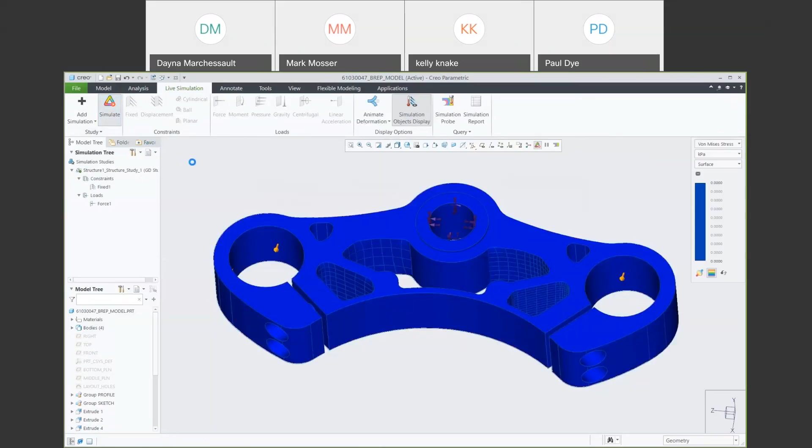Again, with Creo Simulation Live, we can see right as soon as I click to run the simulation, we get results back. I could go out and try all different kinds of designs through generative, take them there, reconstruct the geometry, move all those constraints and loads over into my simulation, and see what kind of results we're getting. So look at these ones here. We're definitely getting a different result from what we would have with the additive model. Some of that deformation has changed up around those outer holes.

We can still go through and animate on it to really understand it. So we can take that info, run more analysis, go back in, build out more designs. Really, it's whatever you want to do there.

So that's a really quick look through what you can do there. But what you can see is it's really, at the end of the day, giving you the ability to create really innovative, but at the same time structurally sound models, maintaining all the structural requirements you might have for it, but at the same time minimizing the material needed to get you there.

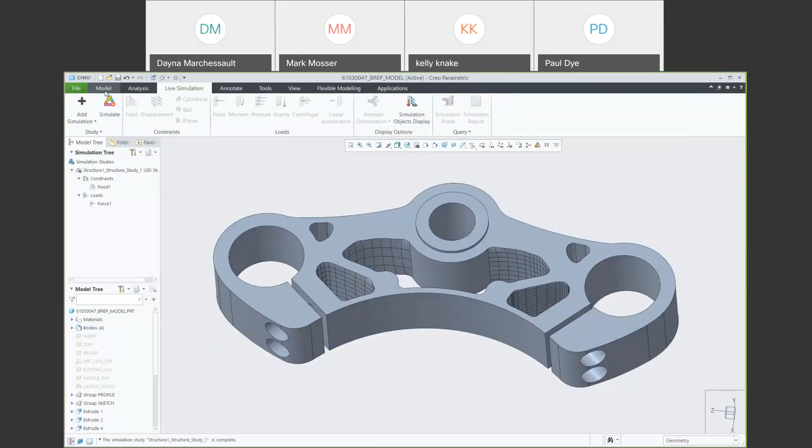So just a brief look through there, but a general look into really the future of how we see people working with design and how we see it going moving forward.

What I want to take a look at now is just a couple other areas that we've really made enhancements to. I want to touch on here first around the Render Studio application. The first thing here is the ability to pause and resume during the rendering. Normally you'd have this mode constantly running by default, but now if you know you're going to make changes, you can simply pause that render and give the computer a break.

We can also render the manikin vision window, essentially taking the view of what the manikin can see. We're able to render that view to get some really nice shots.

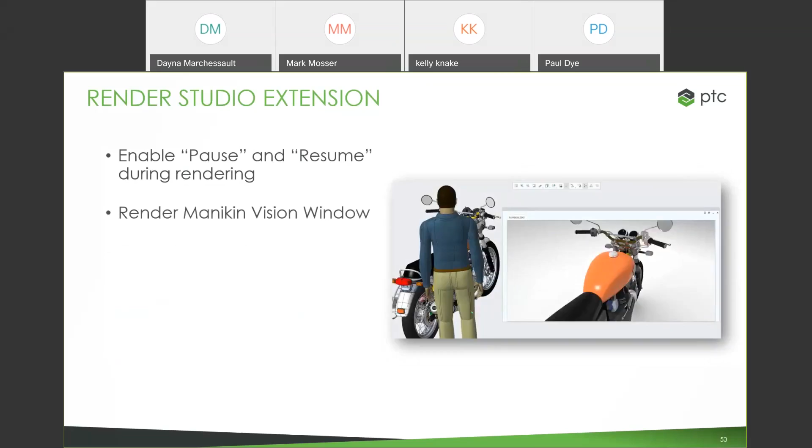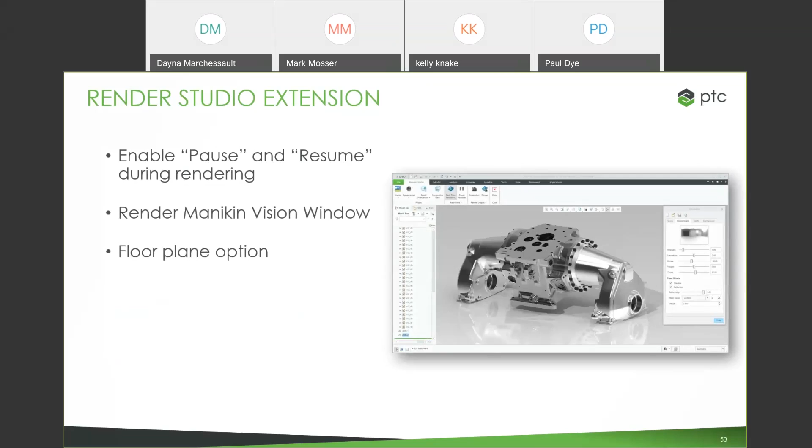There's also now the option to define a custom floor plane for the render. It allows you to flip the model around, change where the shadows and reflections are appearing, so you have that added level of customization, and we've built it out to be easy to work with.

So a couple things there, but next is around the area of augmented reality in Creo. This is where we're able to view these models as augmented reality experiences, something we've been building out since about Creo 3 or 4.

As opposed to just sending out pictures of the model or maybe a step version where they have to try to pull it up on whatever CAD software they're working with, what we can do is actually share it off as an augmented reality experience. Now your customers, your resellers, or even other internal people can pull it right up on their desk, scale it around, see what it looks like, and really start to interact with it more than just looking at a picture.

Around this, we've also now included the ability to publish combined states as part of those experiences. Those combined states can include exploded views, different sections, different appearances, and all of that can be included now with that AR experience. With those different states, the user can switch between each of them very quickly and easily, from one view to the next.

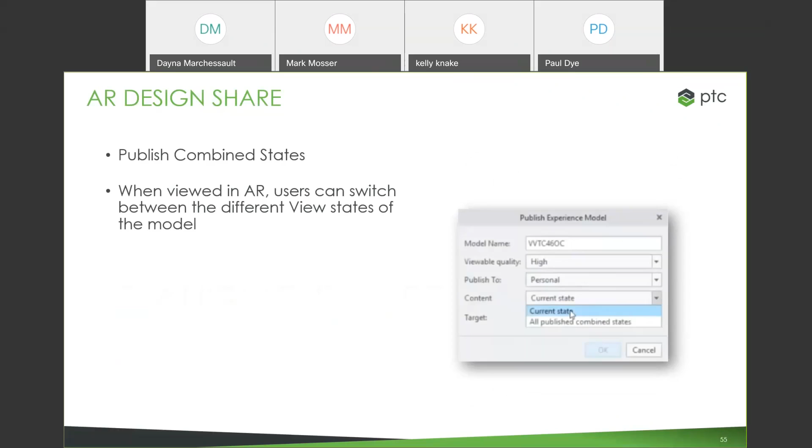And within the Vuforia View app, which is our free to download, free to use application for pulling up and viewing those experiences, you can change between all those different view options.

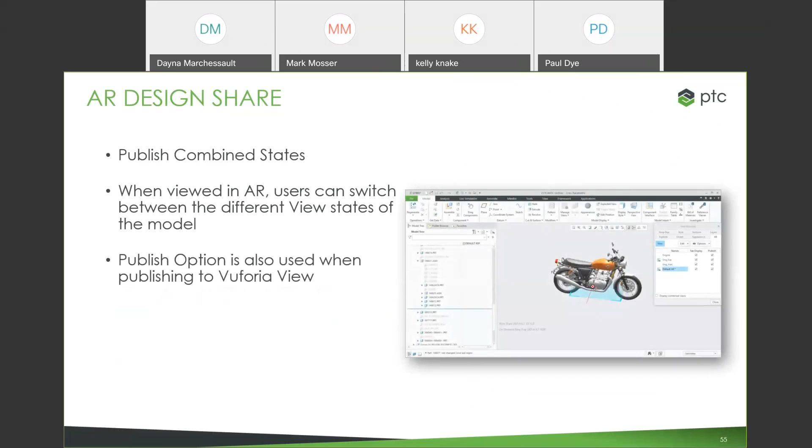And then finally, now I'd like to briefly talk on some of the improvements to the EZ Tolerance Analysis tool in Creo, formerly known as the Tolerance Analysis extension. If you haven't worked with this before, it's a one-dimensional tolerance stack-up analysis tool, powered by one of our partners, Sigmetrix, to perform these tolerance analyses right on our Creo assemblies.

It's something you can do right from the Creo design, working right from the annotations we have for our dimensions, the tolerances, GD&T information, and as we make changes, all those changes propagate to update the analysis data you're getting.

Around that, you're able to work with it in this really streamlined, modernized appearance that we've updated the look and feel of, making it even easier and faster to do these dimensional stack-ups, even if you aren't the analysis guru, as the designer you're still able to get a lot of value out of working with this.

You can define multiple different stack-ups per model and evaluate the impact of those studies, looking at things like statistical results, defects, worst case scenarios, RSS, and even which annotations have the highest contribution to the results you're getting.

So if you have one part or one feature or even one tolerance that's having a large contribution, maybe you could go ahead and tighten up that tolerance in that area and see how that's changing the defects per million you're getting, all those different types of values.